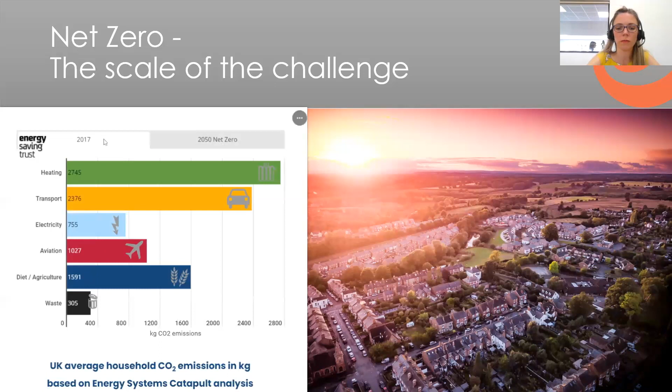We're quite often told that we should be doing fabric first. Well, if the question is net zero, then the answer is heat pumps. The single biggest thing that you can do to reduce your carbon footprint in relation to heating your home is to change the fuel that you use to heat your house.

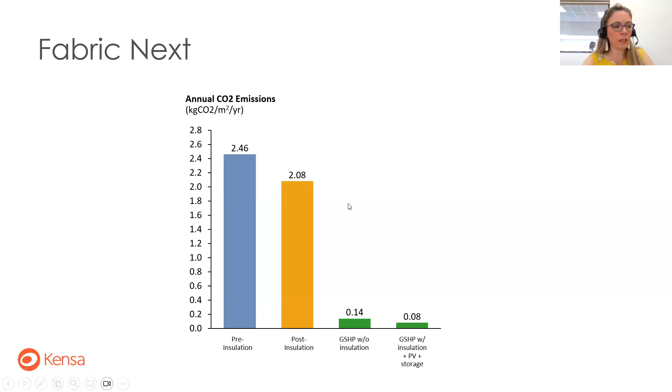But how are we getting on? Well, the UK is currently installing heat pumps at round about 50,000 per year. I saw it estimated that our current rate of installations will probably reach net zero in 600 years at this rate. We in Kensa are pretty sure that we can do better than that. And we're trying to come up with ways that make it easier for people to take up heat pumps and decarbonise their homes.

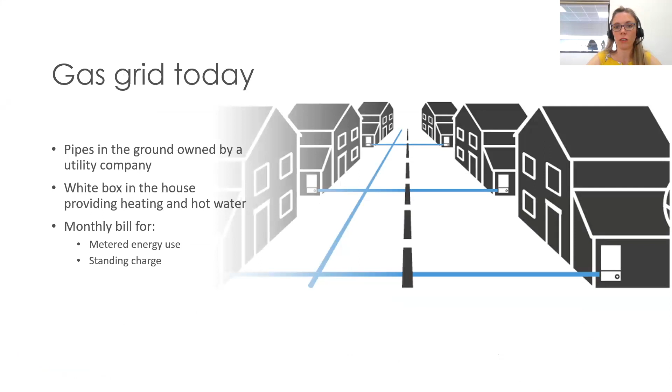So what we're doing is looking at how do we heat our homes today? Everyone's really comfortable with the gas grid. There's networks of pipes under the ground, a little white box in each house, and people pay monthly bills for the fuel that they use and for the standing charge to use that infrastructure. What Kensa wants to see is the same thing, but with a low carbon equivalent.

So we want pipes in the ground connected to every property. Everyone owns a little white box. Kensa Utilities owns the infrastructure asset in the road, and we charge a standing charge for that. The householder runs the heat pump in their house using electricity that is metered, and they're billed for that. So it's a really familiar setup to people.

This is not complex. There's not a big unit outside their house. There is no street in the UK that you wouldn't be able to install boreholes in that we're aware of yet. This would work.

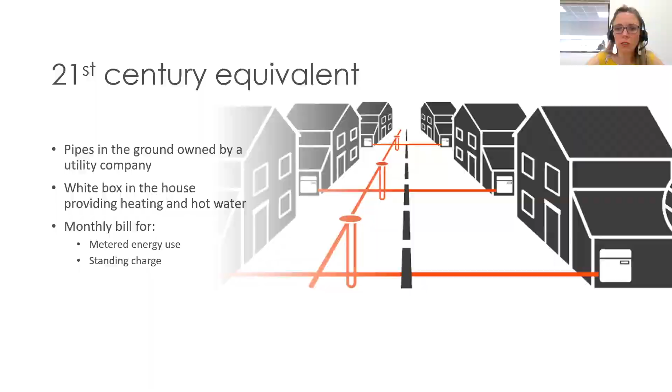So we started Heat the Streets, which is a demonstration of this vision for the future, where instead of people having to invest in the incredibly expensive infrastructure that serves the heat pump, we would install it with a split ownership system. So we install the infrastructure asset and people own a heat pump in their house.

Heat the Streets was a 24-month project, part funded by the ERDF. We'll be receiving around about £3.6 million from ERDF by the time we finish this project. And the rest of the finance for this is coming from Kensa. So what we're doing is the split ownership system. We own all these pipes in the ground. We have 20-year contracts with the people that are using the heat from that network.

And we've worked across 3 sectors. The one I'm going to focus on today is the retrofit project, but we're charging each of these market sectors a monthly standing charge, which is fixed. It can only go up with inflation. We can't add a whole load of additional fees to that. We actually capped the inflation as well, because that was looking like quite a significant threat to people a few months ago. So it's a very straightforward contract that protects the people that are connected to the network.

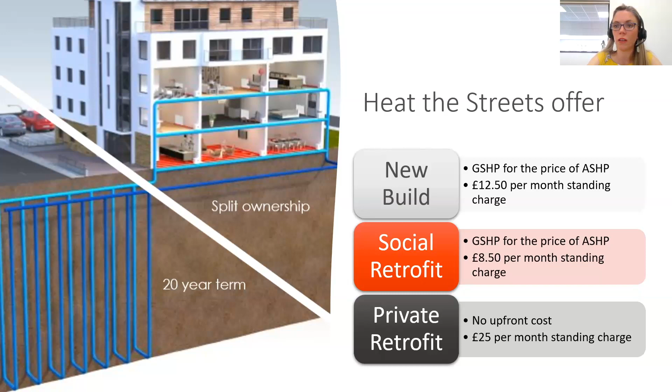So what this is not, which is also quite important, is a high temperature district heat network where people are exposed to big fluctuations in the energy costs and billing. So our aim was to reduce carbon emissions related to heating, but also to demonstrate replicability. So we can show this could be rolled out anywhere. What we're not doing is a project that relies on some really specific local features that couldn't be done easily elsewhere. We're trying to develop an evidence base that's going to allow us to roll this out across the rest of the UK. And ideally, we would actually want other people to be copying this idea.

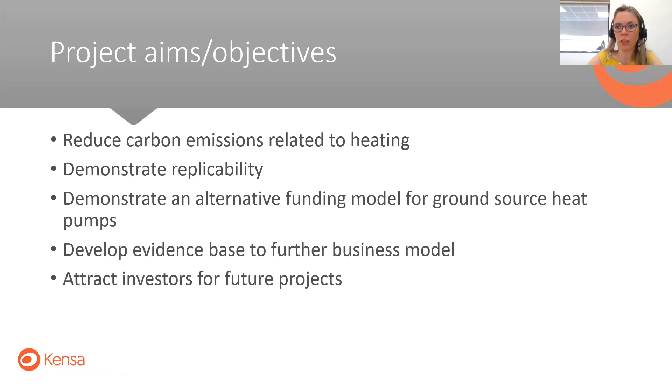So we're talking about it quite a lot. And the benefit of that to a business like Kensa is that the more people that are doing this kind of thing, the more trust people are going to start seeing in the solution. And now another point is this project is a demonstration of what is possible today. We're not trying to do anything particularly fancy. We're using existing technology. We're just changing the ownership model of that, and that allows us to open up a new business model and reduce the barrier of the upfront cost of ground source heating for people.

It's tangible, so it's not some theoretical idea. It's not perfect, and it's not particularly complex. We've picked our battles and we've focused on that so that we can actually achieve something that's useful at the end of the project, not try to fix all of the problems all in one go and stumble. Now that's not to say that this isn't a difficult project, but we've been careful to try not to overstretch ourselves, and it's definitely worth remembering when you enter into your own project. Don't try to solve all of the problems all at once. Pick the ones that you think you can actually overcome if you're doing a demonstration project, and work hard at those.

We had to do a lot of community engagement for retrofit, because you have to bring the community along with you, whether or not they're actually receiving a heat pump. You want them on your side so that they're not blocking progress of the project. And the way that we went about this was a basic sales funnel approach. So you build general awareness, you create interest in the local community, and then you get that local community on board to fight your battles for you.

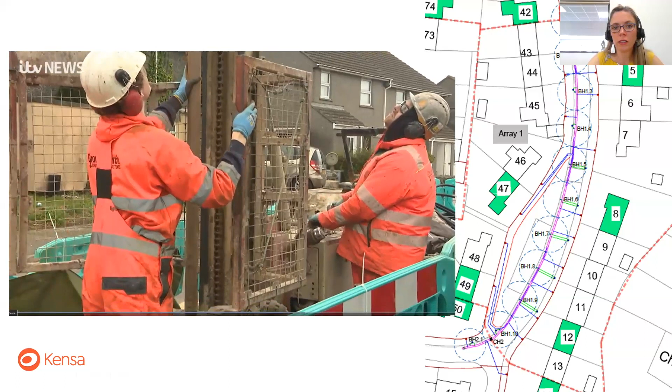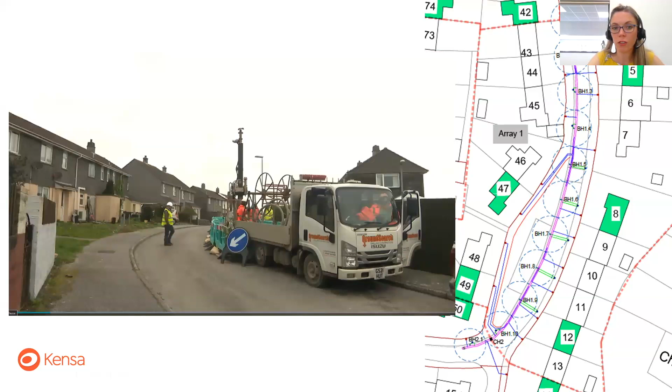And this here is a short video of some of the work that we did in the highway. Now, we didn't actually install the infrastructure in the road for every single property that was connected to this, because that would have taken us too much time. We had to go through planning applications, we had to go through Section 50 license applications to work in the highway. It's a very complex and expensive process. And what we wanted to do was to demonstrate that it was possible.

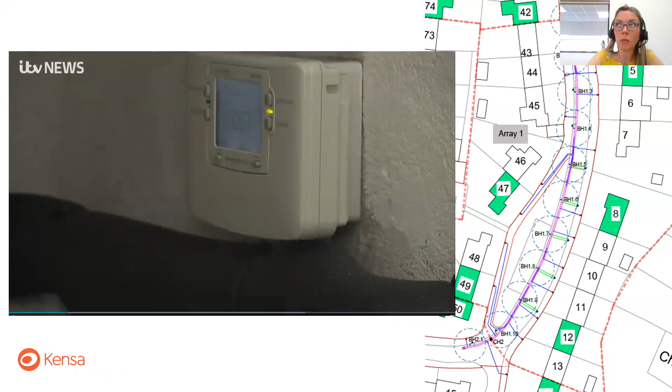So only about a third of the retrofit installations that we're doing are going to be connected to infrastructure that's in the highway. The rest of them are connected to infrastructure that's actually in their own garden. Now, the business model is the same, and we have demonstrated that we can work in the highway. So we have achieved what we set out to do here.

You can see from the drawing on the right-hand side of this, the green properties are properties that are receiving a heat pump during the project. We've also put in connection points for the other properties in this area to join at a later date when their current heating system breaks.

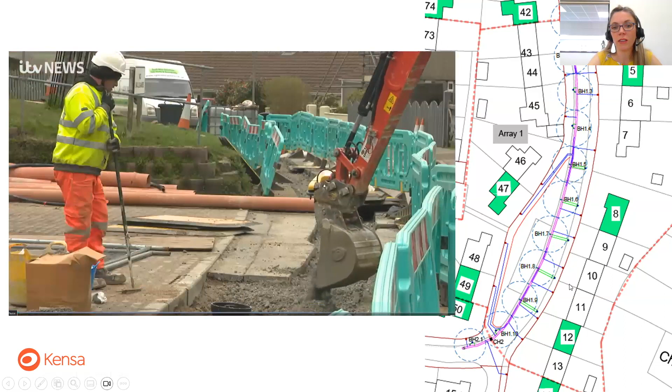And that's actually one of the more exciting things, believe it or not, about this project, is the ones that we don't do, because now we get to sit back and watch and find out how long does it take people to connect to this network? What's the level of interest, the appetite for it? And then what are the processes that we have to go through internally to help that happen?

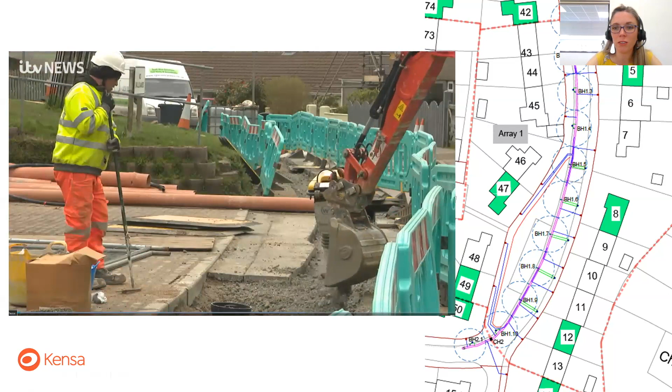The planning process for this project, I thought, was fairly slow and difficult. It took us, I think, 4 or 5 months to get planning permission. I've since been told that that's incredibly fast compared to a lot of other projects. But I have to say it wasn't without issues. We did have planning conditions put on us.

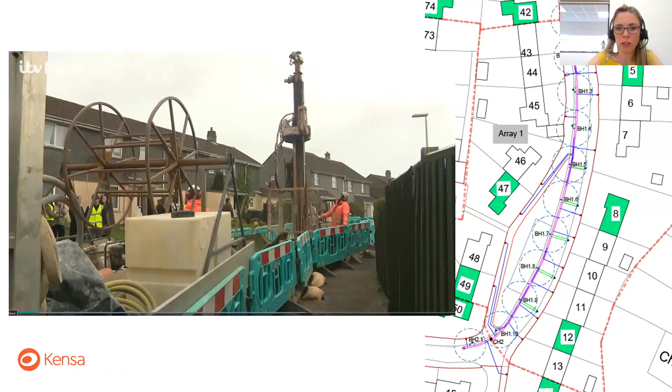So the highways team were concerned that our equipment under the road collecting heat was going to freeze the surface of the highway and cause health and safety issues. It's not an entirely silly idea, because we are extracting heat from the ground, but the truth of the matter is that if we'd installed this infrastructure about 3 meters to the side, it would have been considered permitted development and we wouldn't have to go through planning at all.

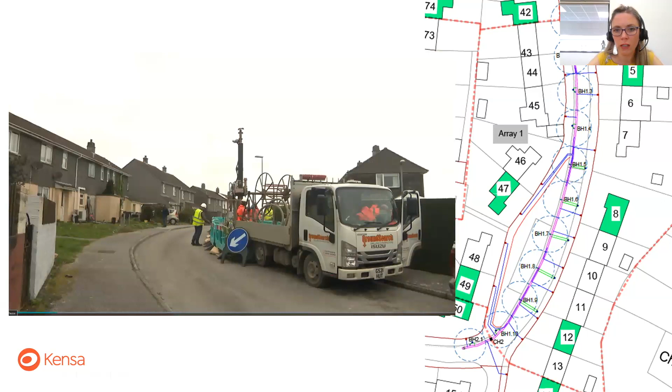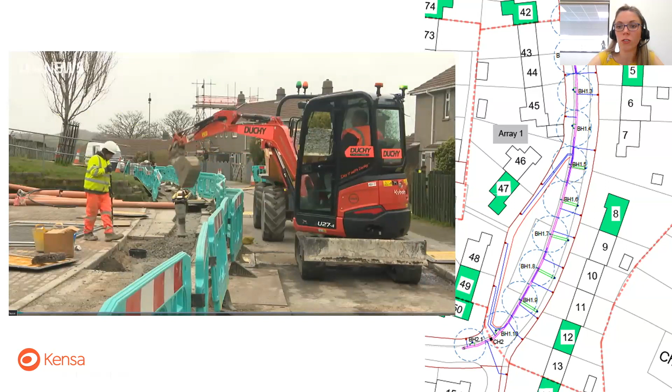So this is where it helps us that this technology has been used before. It's evidence that this is okay. You know, Kensa's done, I think, 12,000 installations like this, and the only difference to this particular part of the project is the location of that technology. That's the only thing that's different to business as usual.

The outcomes of our project. So we've now got 6 weeks to go on this project. It's grant funded, and we're limited in time because of that, the availability of that grant funding. At the end of the project, we will have installed 100 heat pumps across 5 sites in Cornwall. Those properties will see an immediate 70% reduction in their carbon emissions, and that will continue to go down as our

grid decarbonises. That work that we've done in the road, installing boreholes and the shared ground array, is a world first. Other people have installed the trenching to serve properties, but not the boreholes in the highway. And that is quite a complex thing to be doing. And it's definitely incredibly expensive. So that's why it's really helped us that we've had the grant funding available to try that.

We've also made Kensa Utilities an operational utility company doing this. So we've developed the suite of legal agreements that we needed. We've set up all of the customer accounts, and we're registering these sites with the Heat Trust, which is a voluntary way to show that there is security for the people that are connecting to this. We've had some really positive feedback from our residents and incredibly high profile media coverage for what has been a very small Cornish company.

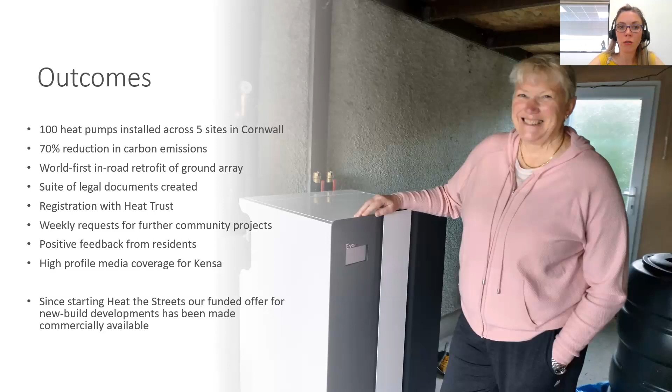So we've been on the local BBC twice. We've had ITV down. We had an article in the Financial Times. So it's been a very high profile and valuable project for Kensa. However, there are some limitations. So we've not quite managed to do everything that we want with this project, and that's helping us to understand what we should be doing next.

So we've got a reputation through this of having a solution for decarbonising rural areas because we're demonstrating it in a rural area. We've not demonstrated that there's a willingness to pay from our customers because all of the private retrofit received the heat pump with no upfront cost. And we had to do that because of our time limitations, but then we're missing out on the learning as to what would people pay towards this. And, you know, can we get people to pay enough that we can do this without subsidy in future?

We've also experienced very high capital costs, and that I think is partly to do with our grant funding. When you tell people that you've got a grant funded project, they think there's a lot of free money. We've also been limited to the time frame that we can deliver these works in, and so therefore some of our contractors have been able to kind of hold us to ransom with costs.

The time restriction and the limited local supply chain that we're particularly affected by being on a peninsula has meant that we've had to limit the scale of the project. We were about to get into contracts for an additional 100 homes to be part of this project. So the total number of heat pumps installed would have been 200, but we had to back out of that because we don't have enough installers to work all at the same time, and we weren't able to extend the duration of the project. The other issue that we've got is this is an off-gas village that we've focused on for retrofit. So we're not quite demonstrating how this business model stands up against gas as the counterfactual.

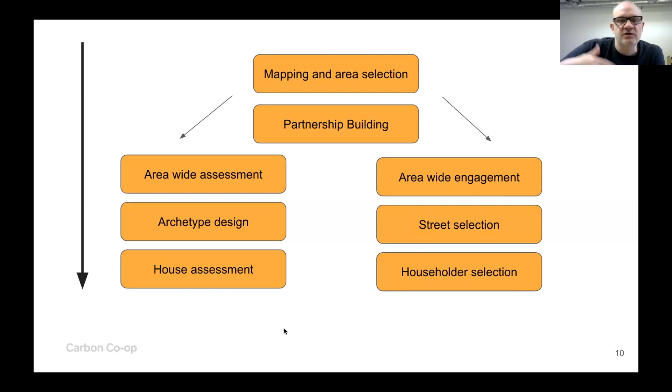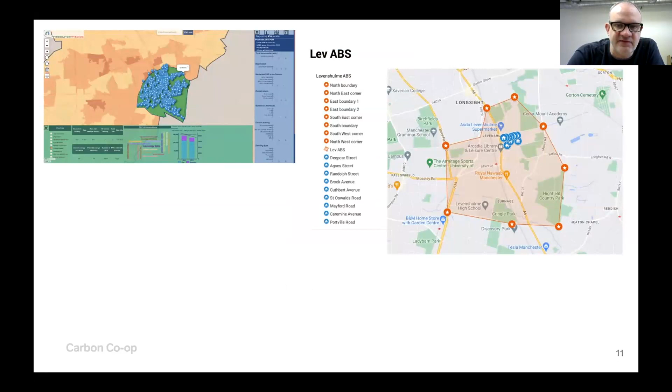I've got some screen grabs here, but this is the area you can kind of see. We're focusing on certain streets. As I said, we've done quite a lot of mapping. We looked at energy, archetypes, demographics, fuel poverty, all sorts of things.

But yeah, this is some of the archetype designs that we've done. This is like the mid level of design. Beyond this is a very detailed assessment and then design process. But this gives you a bit of an indication of the level of design.

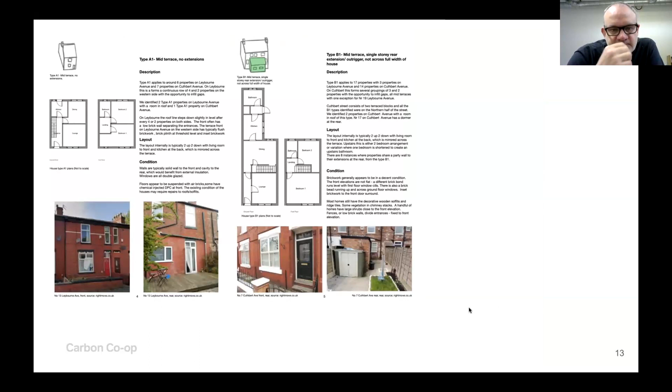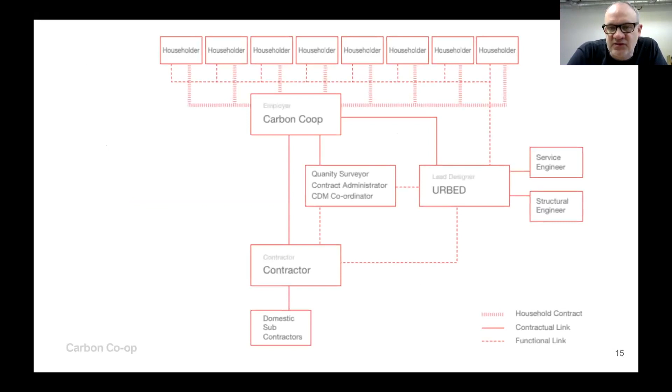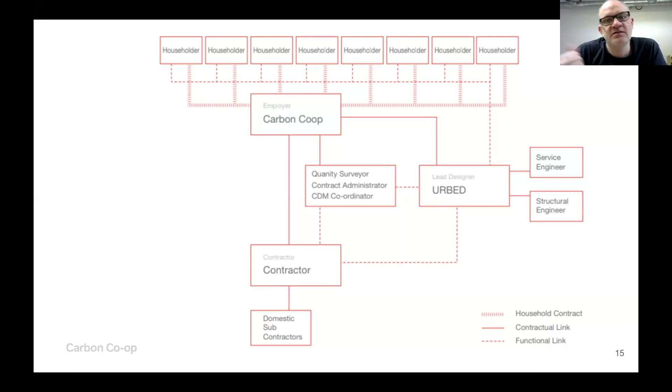This is a very simple, I'm not going to go into this either. It's a contractual diagram, but at the top, you can see many householders. In the middle, you can see Carbon Co-op. So we're contracting with many householders. We do bear contractual risk, and then we contract a contractor to do the work. To the side, we have technical advisors, architects, and what have you.

What's your risk appetite? Construction is a risky game. You just need to mitigate those risks with appropriate design and insurance and all that sort of thing. So again, if you're just starting out, maybe this isn't for you. If you're more technical and you're interested in stuff, this could be a really big potential approach. What's your technical capacity? What's your track record? Is this something new to you? Have you been involved? If it is new, there may be things you can do stepwise to get involved in this with the idea of an area-based scheme at the end of it.